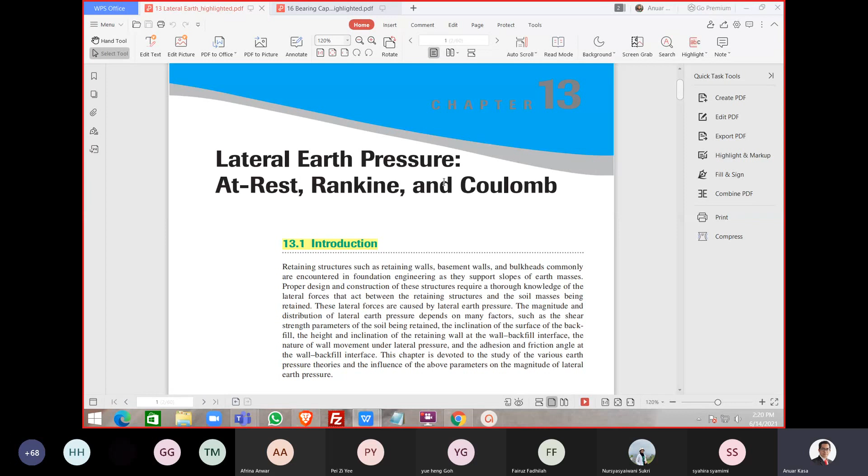Okay, so now imagine that you want to create a retaining wall. So you're going to have the wall itself. For example, okay, like this one, this is a retaining wall. So, okay, let me see whether I can get the highlight or not.

Okay, so let's say this is a retaining wall.

And definitely you are going to design this. Let's say you have a slope. Normally we create a retaining wall at a slope. Let's say we have a slope, and then we want to create a retaining wall like this one. So we need either to fill this area, the slope, something like this, so we need to fill this side and create a retaining wall. Or sometimes we have the existing ground line like this one, so we have to cut the ground and create a retaining wall.

So there are basically two methods of construction.

So let's say we decided to create a retaining wall, and now we want to start, since we learn concrete design, let's say we want to have a concrete retaining wall, or even we can have a steel retaining wall. Doesn't matter, actually there are many types of retaining wall: modular retaining wall, cantilever retaining wall, gravity retaining wall, and so on. I think that is in the next chapter, or maybe the previous chapter.

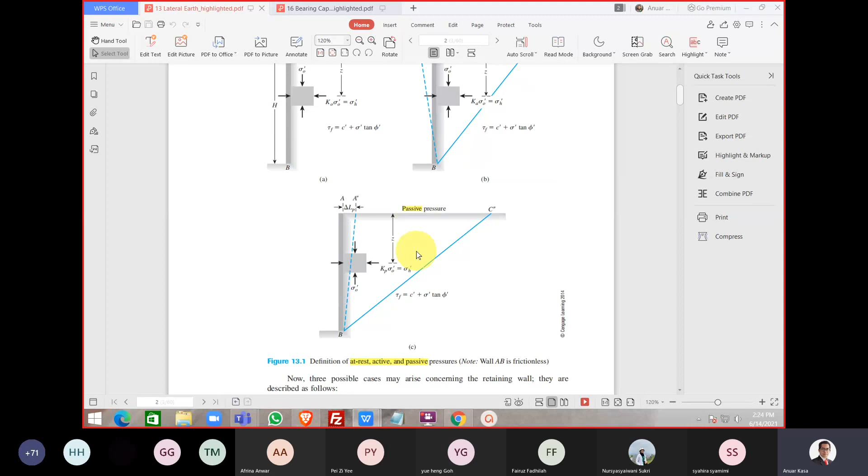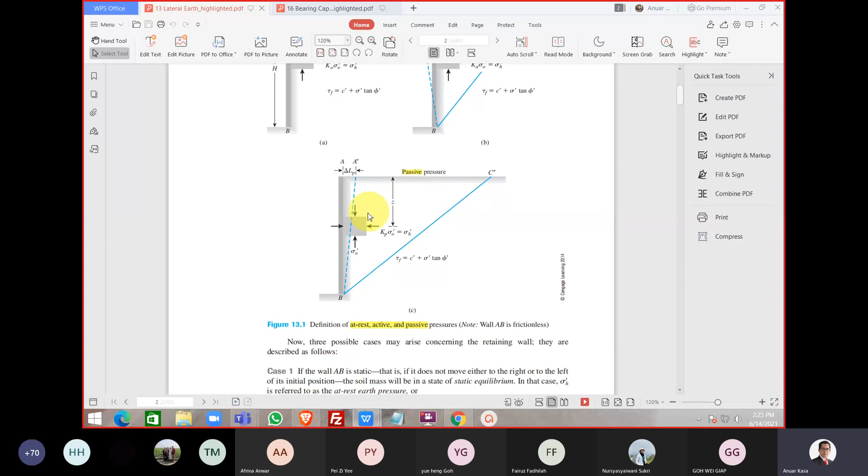And then the last one, the passive case, is when we design the wall, we want to make the wall push to the right of the soil. Then we need additional force from the soil. Since the wall itself is pushing to the right, the soil needs to have a greater force or pressure, so that the wall is in the shape like this one, in the passive shape. So there are three cases here.

If we look at the cases when we want to decide, for example, when we want to have the at rest, when we want to have the passive case, and when we want to have the active case, the decision before we decide is that we need to know.

Let's say we want to have a stronger wall. The strongest would be the wall in the passive pressure, because when we design it, we assume it is pushing to the right, and the forces or pressure from the soil on the wall is much higher. So this is the very conservative design.

And then maybe we want to ask, why on earth we want to have this kind of wall? It is like slanting to the right, not to the left or straight. So normally we design this kind of wall, for example, for a jetty, where this area is maybe the sea water, and there are boats or ships that sometimes hit the wall. So that's why they make the wall much stronger than the normal case. So that would be one of the applications.

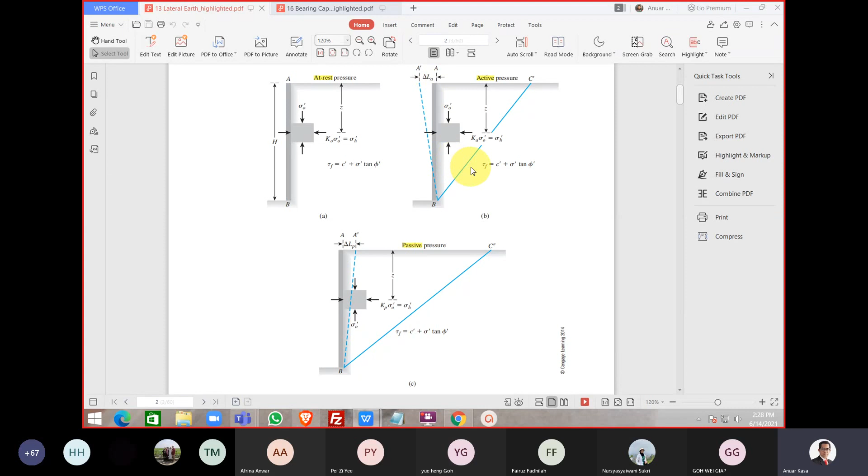Then to be economical, we design in the active pressure case. Something like this - the wall, we make it move to the left. And how far are we going to move the wall? Normally it depends on the height of the wall.

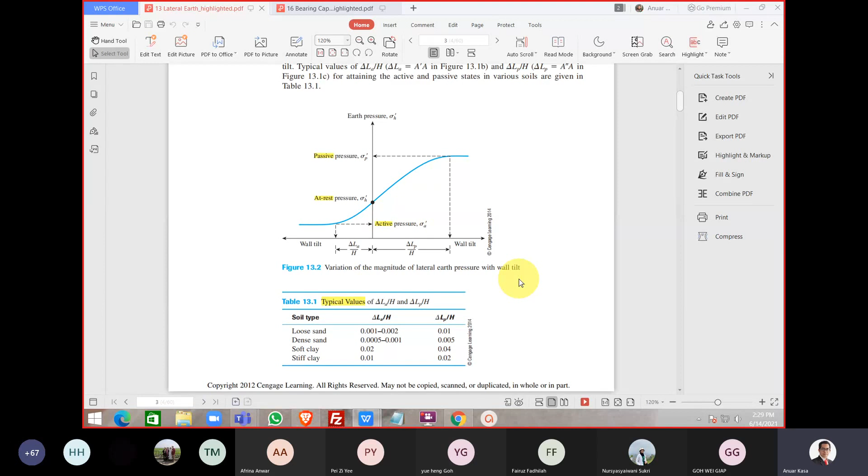Okay, so that is the three conditions. So if you were to imagine it simply - at rest is like when we are not hungry, we are just steady, so our tummy will be just flat like this one. But this one, active pressure, our tummy moves a little bit forward because we just ate.

That is active case. And this one, let's say we don't eat for 3 days, for example, our tummy is concave, very hungry. This is normal condition at rest, active pressure, we are full. Our tummy is big now.

So in that case, which one is economical if you were to invite these people to eat? Definitely, people who is full is cheap, eat little. For at rest, you can eat maybe 1 or 2 plates. But for the passive pressure, you're gonna have to spend a lot of money, because he's hungry.

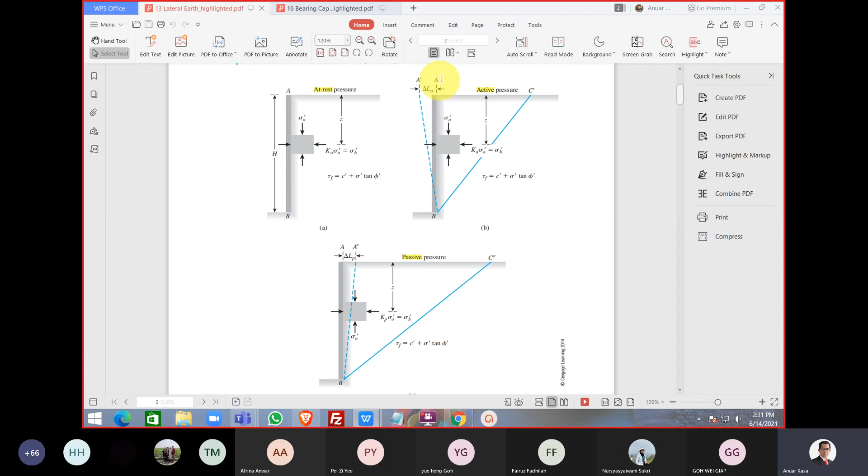So that is the condition to see which one is economical or which one is not economical. So most of the time, the engineer designs the active pressure case, because we want to achieve economy, use less money. So based on that 3 conditions, then we can start do the design or the calculation.

The idea is actually we just want to know what is the lateral pressure from the soil to the wall so that we can design the wall. If you are taking concrete design courses, you need to know that we need to provide the pressure or forces applied on the concrete. So to design the concrete, we need to know what is the lateral pressure applied to it due to the soil behind it. So the whole topic is about how to calculate the lateral pressure that the soil gives to the wall so that we can design the wall.

Okay, after the pressure, definitely we want to know the force applied on the wall. The concept that we need to know is K value. K is actually a ratio between horizontal pressure or stress over vertical stress. So actually we want to calculate the horizontal stress here.

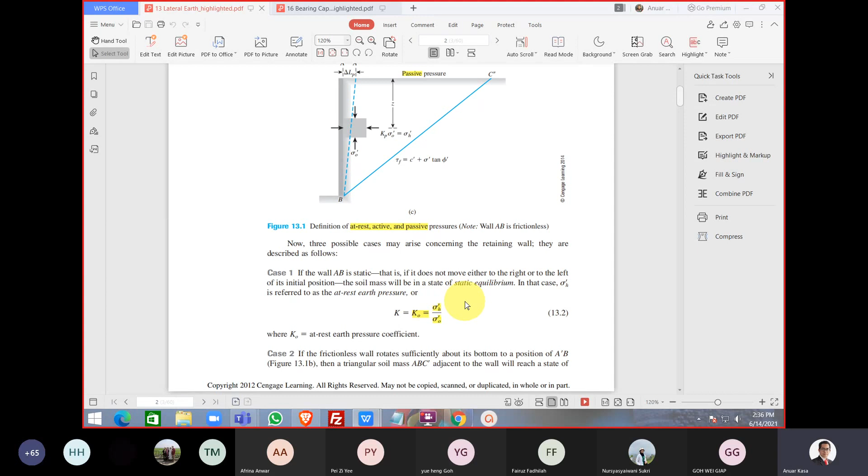So this equation, 13.2, is a general equation that can be applied to all three cases, except the equation for K naught, Kp and Ka is a little bit different. So you need to know first whether you want to design active case, passive case, or at rest. Then you need to know the equation for active, for passive, and so on. So it's just a matter of finding or using the right equation to calculate the lateral earth pressure or horizontal stress. The whole chapter is about using that equation.

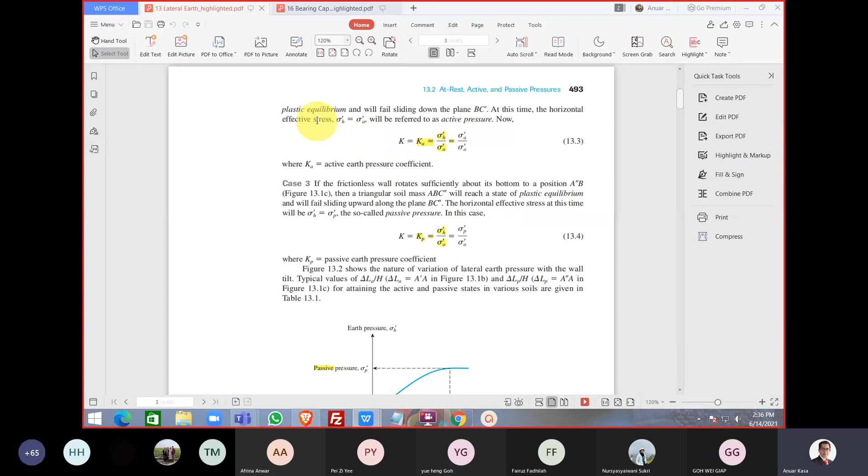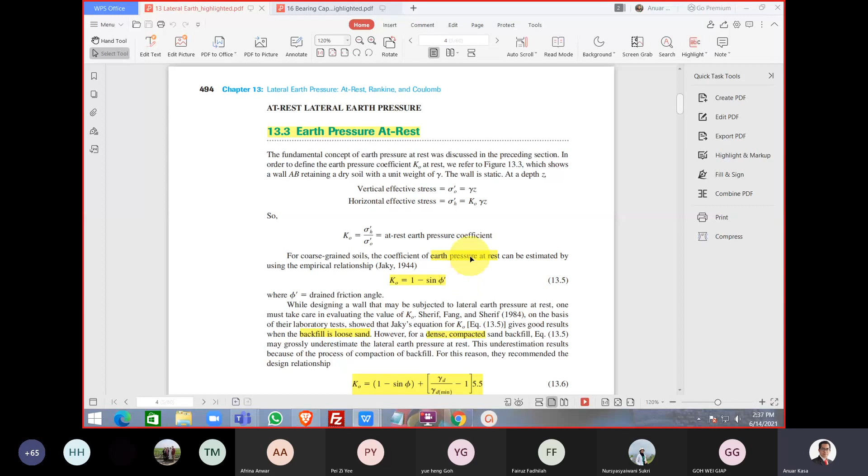So okay, now we look at, for example, the at rest case. At rest, the K value is 1 minus sine of effective phi. This is the equation that you're gonna use, and here it also mentions that for dense and loose sand, for example, you use this equation. So you just need to know which equation of K to use.

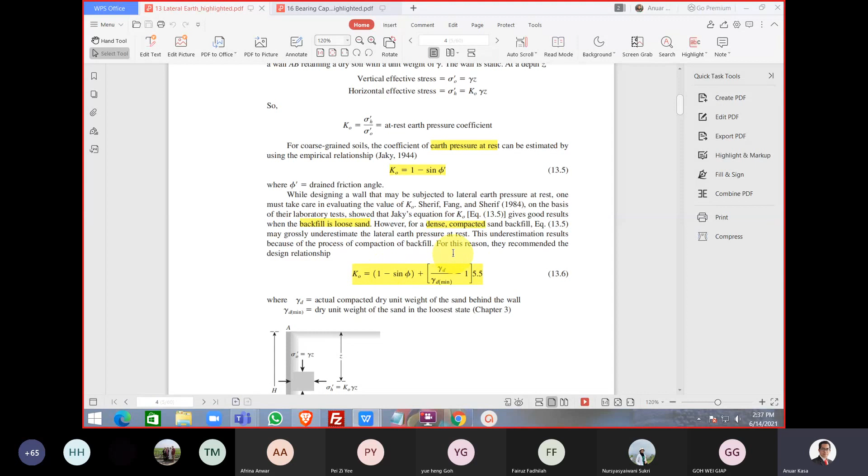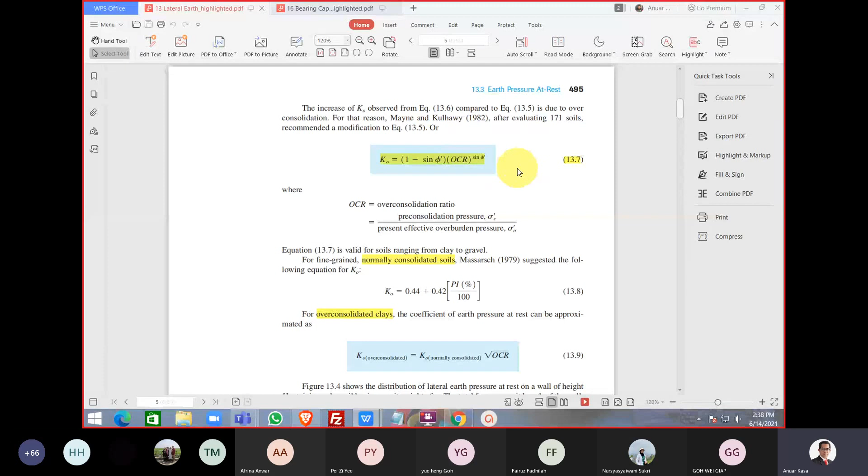And then this one, if it is about over consolidated soil or backfill, then normally we need to know what is the OCR, over consolidation ratio. Normally, if the question requires you to use this one, it will tell you that it is an over consolidated clay, and the OCR value is this and that. So then you know you need to use equation 13.7 and so on. This K, what is K naught for over consolidated, normally using this equation.

Actually, we can prove it by calculating the vertical stress. In this case, K is constant and vertical stress is increasing because the more load on top, the more vertical stress. So to calculate the horizontal pressure here, it is just K value times the vertical stress, which can be calculated easily.

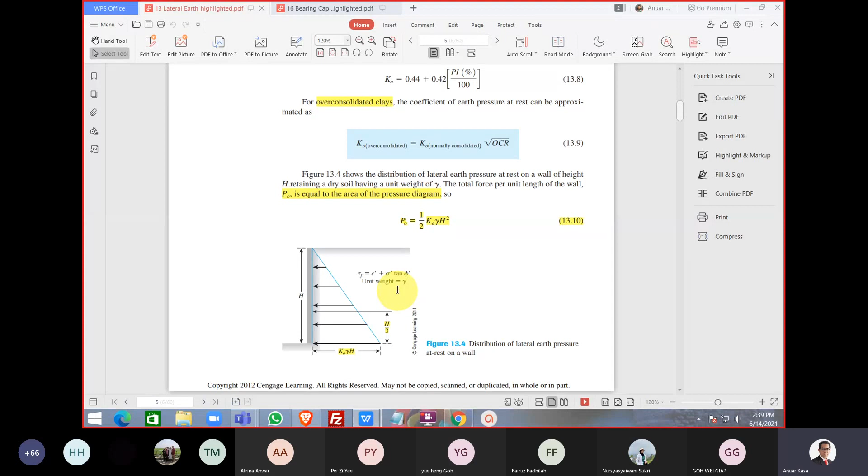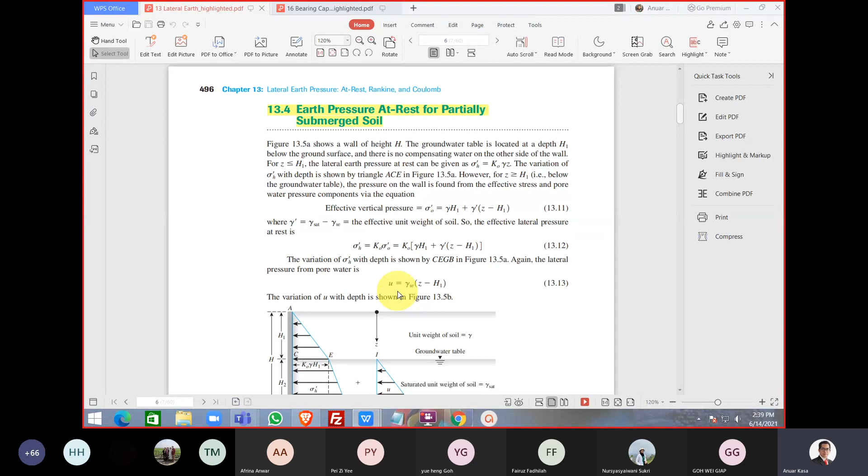Okay, here is about earth pressure at rest for partially submerged soil. When there is water, let's say the wall is submerged in water, for example like this one. The groundwater table is up here, so we need to consider the effects of water pressure.

Normally if there is no water pressure or groundwater level, the distribution of lateral earth pressure is just a straight line, A to C. But due to the water here, we have something like this, not a straight line, which is due to U, the pore water pressure. Pore water pressure is actually the unit weight of water times the height of the water.

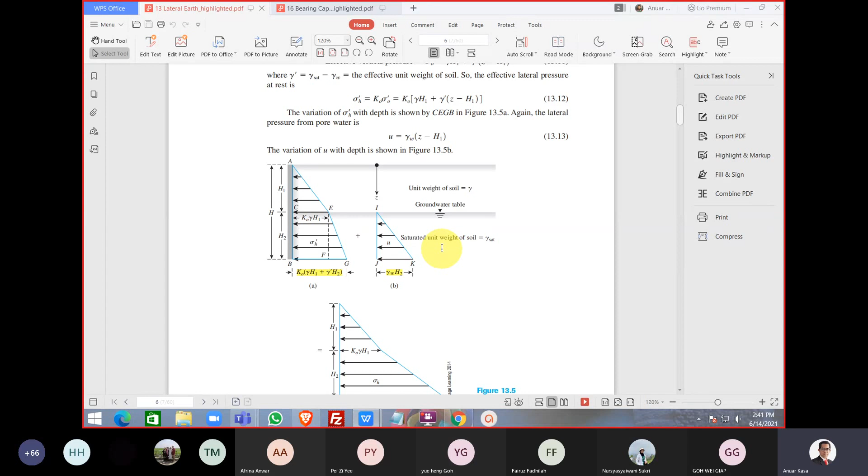So you can easily calculate it. I think in the previous chapter we also dealt with how to calculate the effective stress when there is water. It's the same thing, because that is the vertical stress. When we know vertical stress and the K value, we can easily calculate the lateral pressure, which is horizontal stress. So this is just a combination of these two.

This part is about the dry unit weight of the soil, and this part is due to the saturated unit weight of soil, and this is due to the existence of water, which is pore water pressure. We need to combine these two, so we get a pressure distribution something like this.

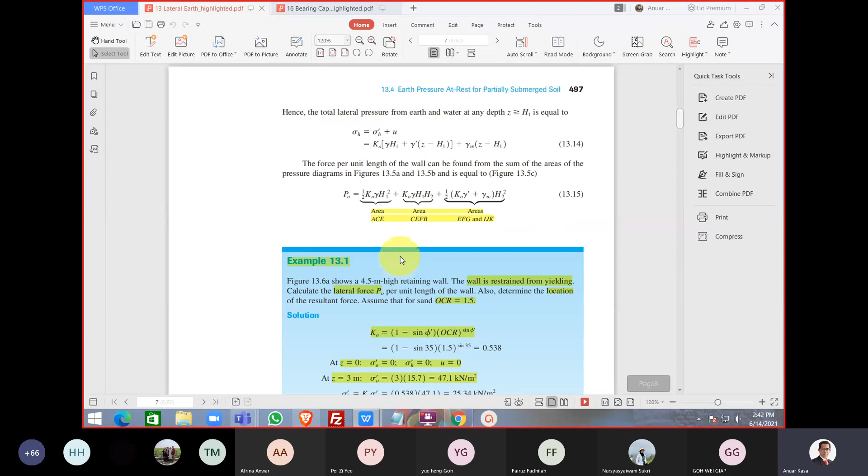Since we know that water pressure diagram, we can easily calculate the force due to the pressure. For example, in this case, for this upper part, the force location is 1/3 from the bottom here, and the value is just the area of the pressure diagram. The same thing also for this part, we can make it two parts, a rectangle.

For the rectangle, the location of the force is half of the height, so we know it is at the middle. The value for the force is actually the area of this pressure diagram. And we can do the same for this triangle, the location is 1/3 of the height below here, then we calculate the area of the pressure diagram to know the value.

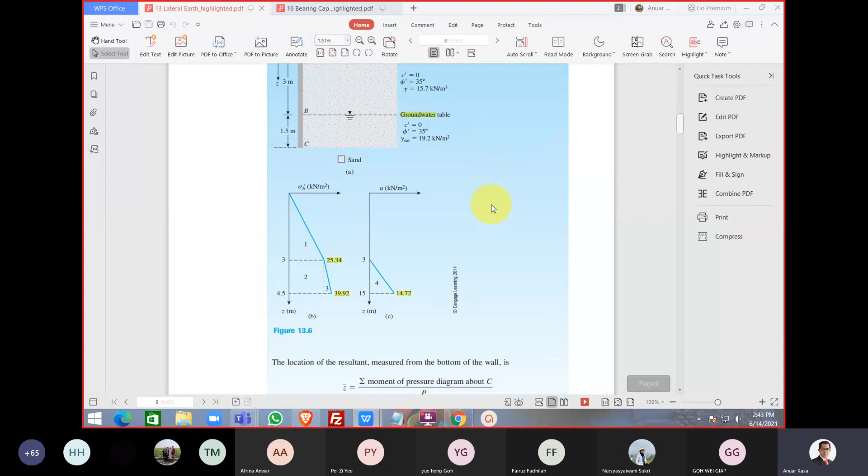The same thing for this one. So at the end we can get forces, not just a force but many forces. And at the end we're going to make it into one single force that represents the forces. So it is like this one.

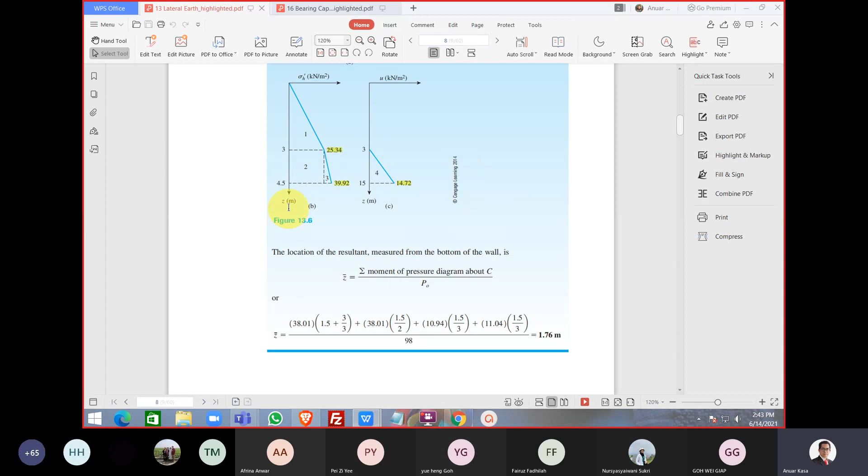So we can calculate, you can look at example 13.1. I think I tried to speed through because these should be in the lecture teaching video. For today, I just would like to go over it quickly so that you can ask questions if you're not sure.

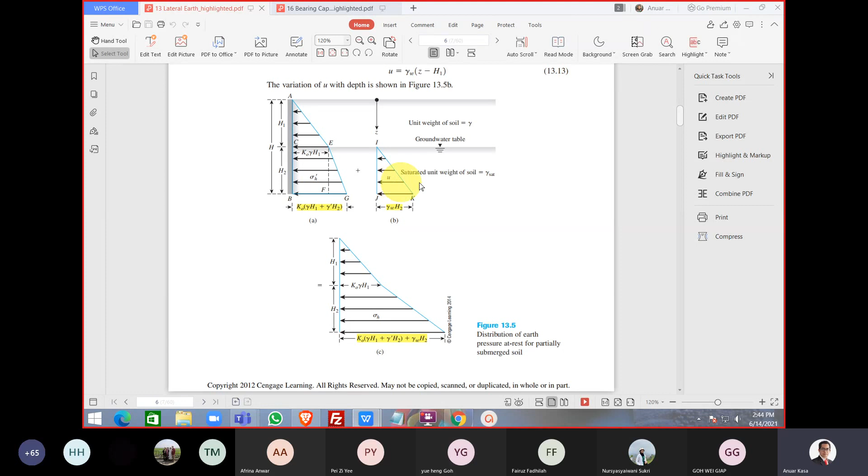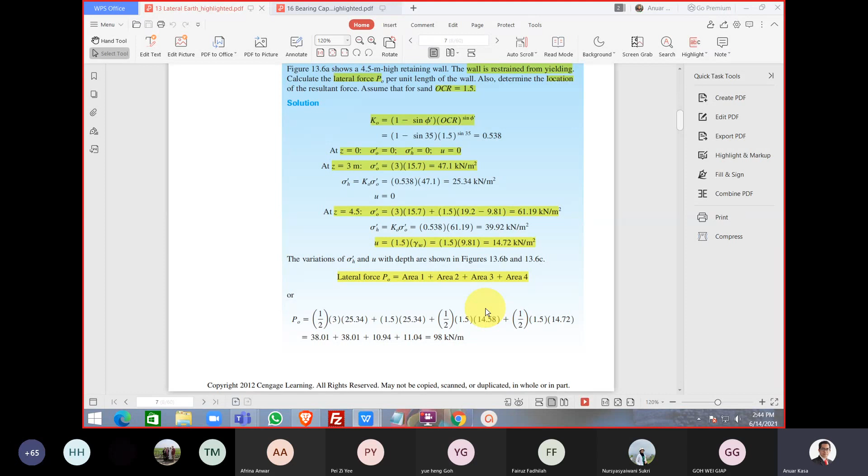Okay, so this is how to calculate the force, it's about the area of the pressure diagram 1, 2, 3, and 4. In this case, I think they are referring to this area, the triangle, and also the triangle. At the end, you can calculate the total P, what is the total force that the soil applies to the wall.

And the same for this one with the groundwater table. I think if you read carefully through the example, it won't be a problem for you to understand. Okay, next we go for active pressure.

Remember just now we were talking about at-rest pressure. Now it is the active pressure Rankine theory. So here we have another two theories, which are Rankine and Coulomb theory.

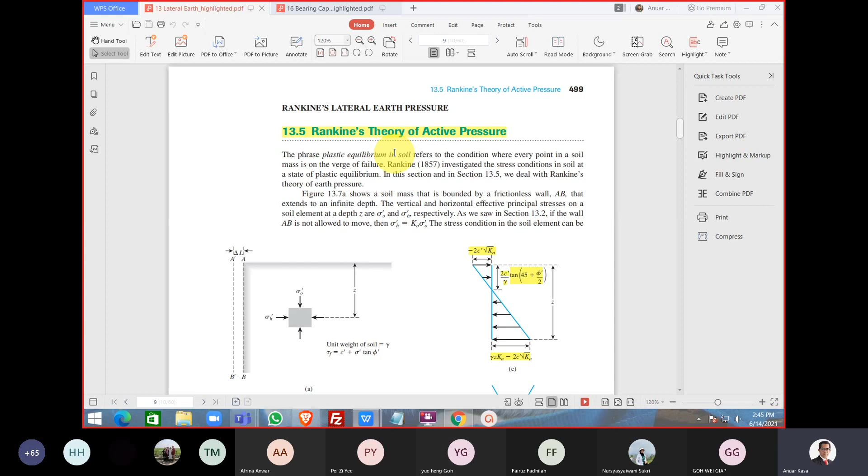The difference between the two is that Rankine considers the wall and the soil behind it to have no friction, meaning there is no contact or friction between soil and the wall, so the calculation becomes simple. That is Rankine. For Coulomb, it considers the friction between the soil and the wall, so the calculation of that theory is more complicated. When the calculation is complicated, the equation we get is a little bit longer than Rankine.

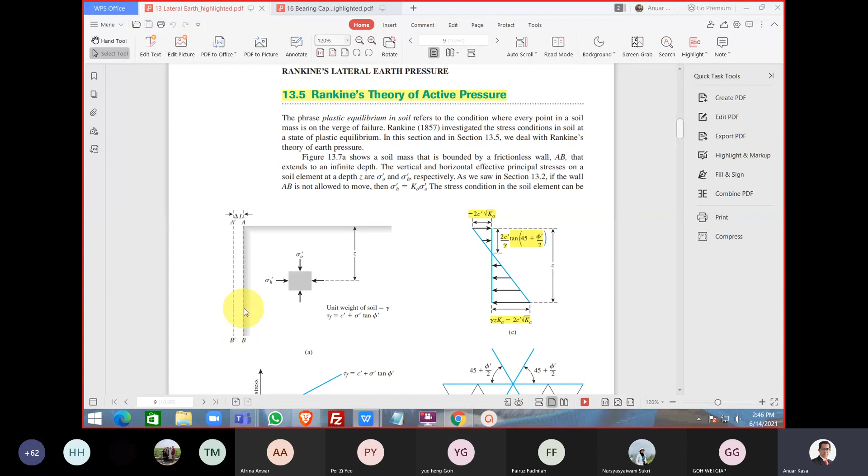Okay, for active pressure, since we say active, the wall will move to the left, so it is like bending. The wall profile will move to the left with a certain amount. So if we look at the pressure diagram, it becomes like this one, because the wall moves to the left, so the pressure also becomes like this. These are the diagrams.

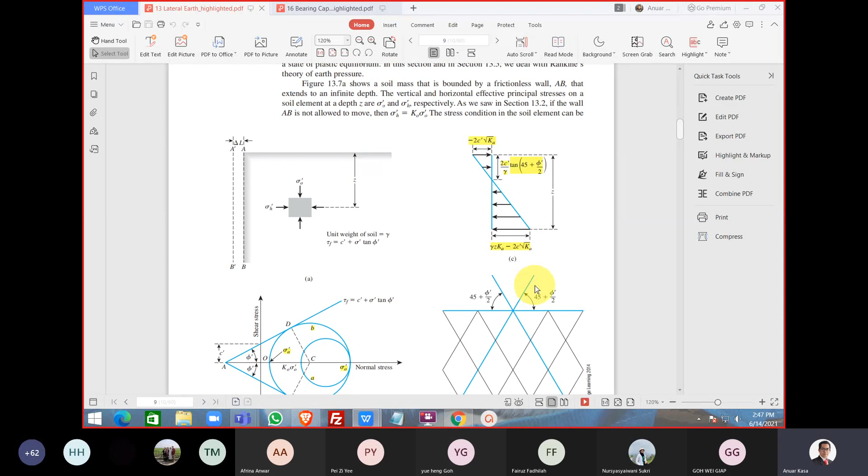We also need to know whether the soil is granular, which is sand, or whether it is cohesive, which is clay. So for clay and granular material, the equation for K may be different.

So you need to consider, when you want to design, the soil condition: whether at rest, active, or passive, and also the type of soil, whether sand or clay, whether over consolidated or not over consolidated, whether there is a groundwater table or not. You also need to consider whether you're using the Rankine theory or the Coulomb theory. From all those different combinations, you need to know which one applies, and at the end pick up which K equation is the right one.

So your task is actually not very difficult. You just need to know: if it is Rankine, use the Rankine equation factor. If it is clay, find the clay case in the Rankine method. If there is a groundwater table inside, then you need to consider pore water pressure. So those are the things you need to consider before you choose the right K value equations.

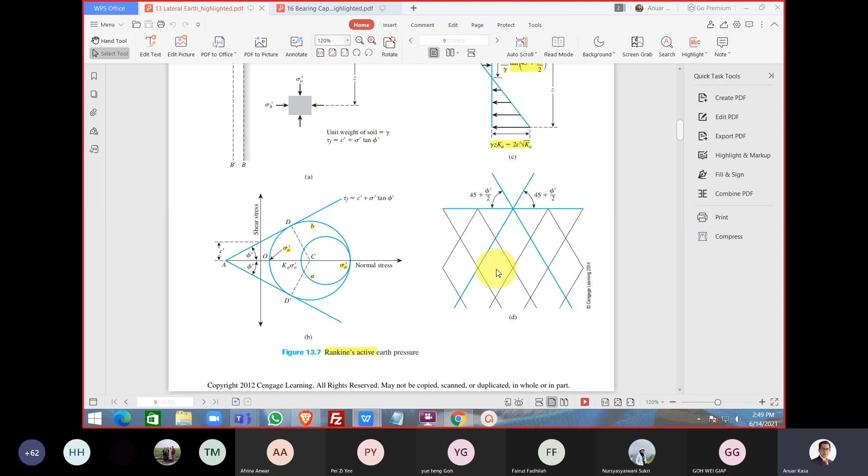This is, for example, Ka, for the active K Rankine method. The equation is tangent squared of 45 minus effective phi over 2. If you want to design for the active case, this is the equation you need to use for K. And then you can use the other equation.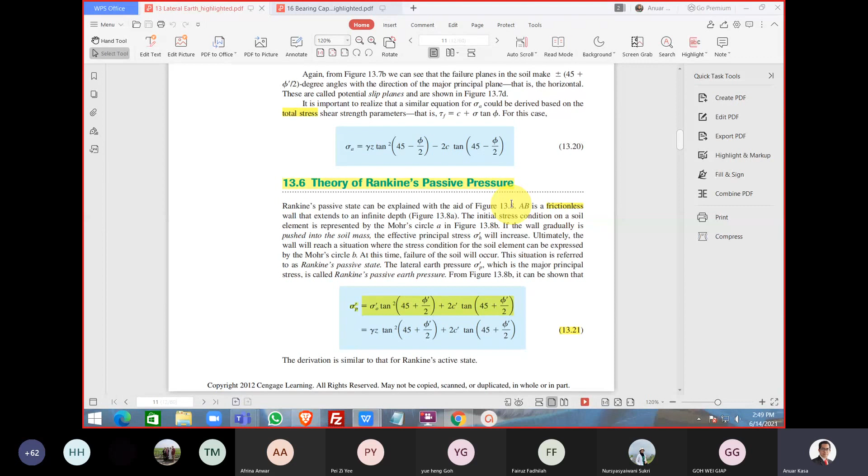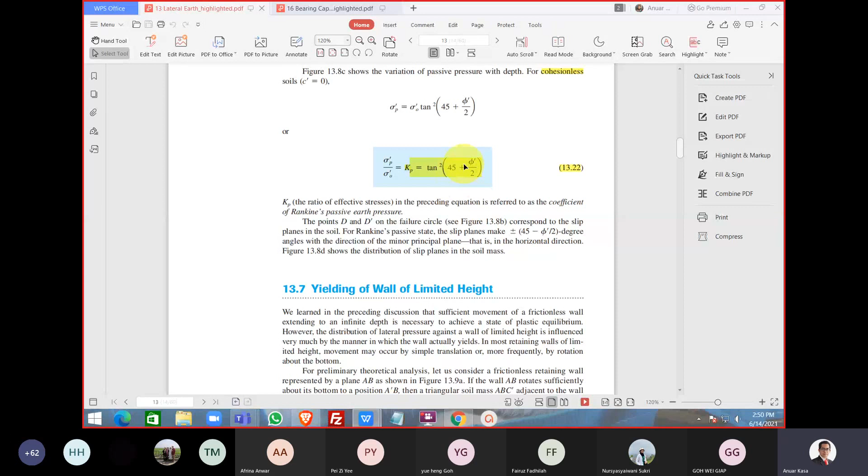This one is for the theory of Rankine passive pressure, for the passive case, where the wall moves to the right, so use this equation. This is Kp, the coefficient of Rankine passive earth pressure: tangent squared of 45 plus, instead of minus. So this is for Kp, while for Ka it's 45 minus.

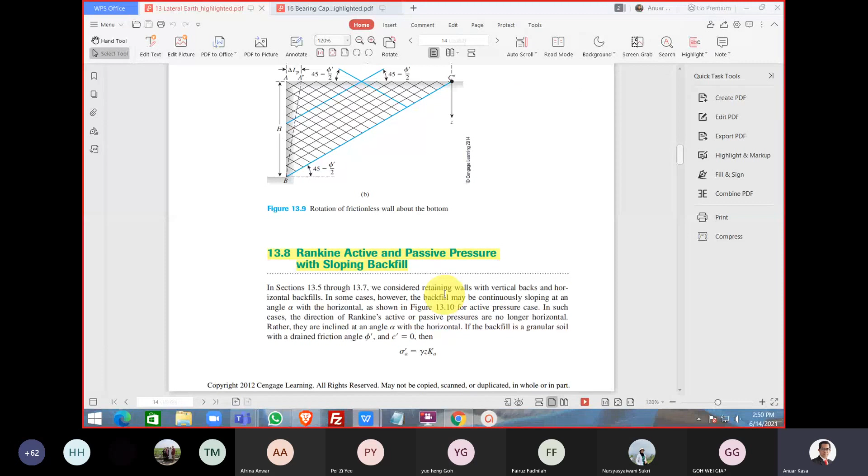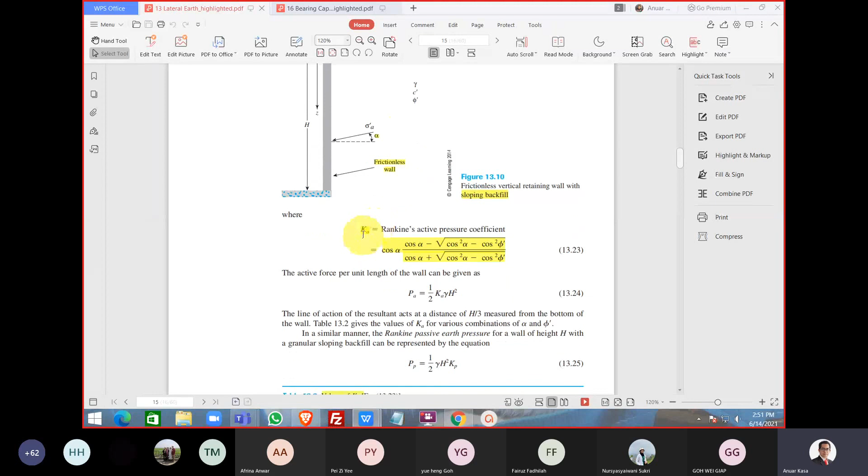On top of that, you also need to know whether the wall has a sloping top or not. For example, this is the slope. Normally there is a flat top, but when your wall has a sloping angle, you need to find the equation for it, because it's a different equation for Ka. So now it's a bit more complicated because there is a slope on top of the wall.

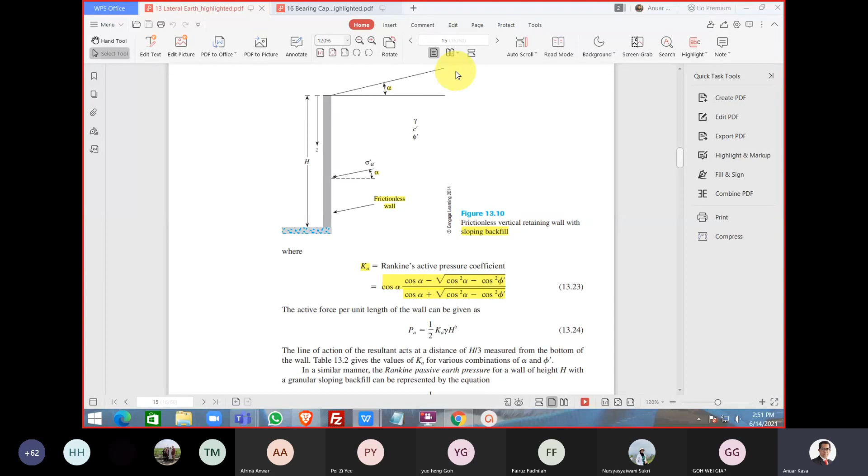You can use this handy table to find the value of Kp, or you can use the equation. But the equation can sometimes be difficult to calculate using a normal calculator, so the easiest way is to use the table, for example Table 13.3. You know the sloping angle and the phi value, and then you can get the Kp value from the table, so you don't need to use the equation to calculate it.

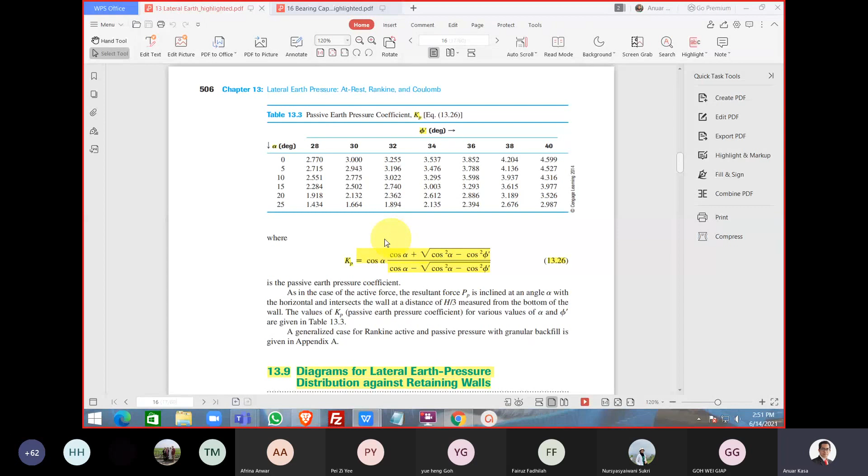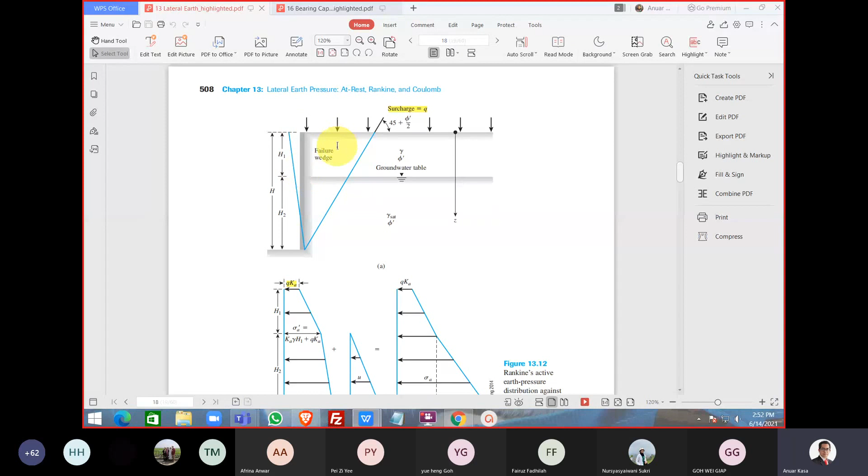This is the diagram, normally it looks like this. When there is a groundwater table, it becomes more complicated. And when there is surcharge, meaning maybe there is a building on top of the retaining wall, it also makes your calculation complicated, but it does affect the vertical stresses. So here we have this term.

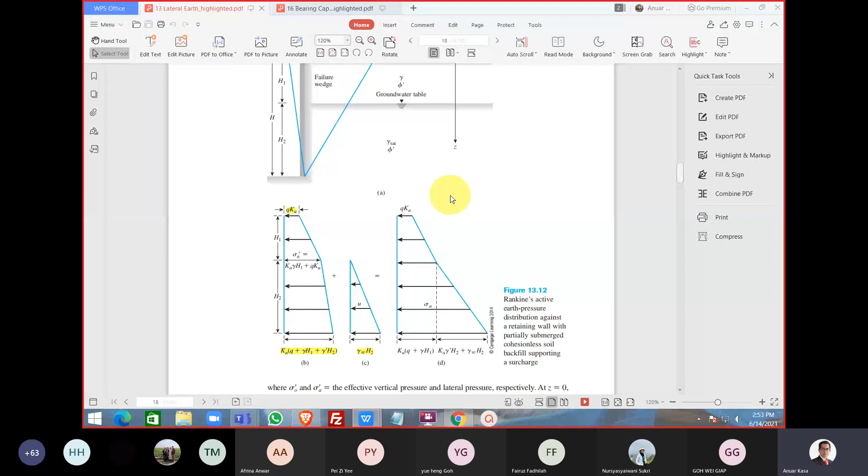Surcharge in kilonewtons per square meter times Ka, that is the value. And then we have the groundwater table here, that's why we have a different shape - it's not a straight line from top to bottom, due to the groundwater table. If you understand it, it's easy to see why this term and that term exist, because they need to consider the groundwater table and also the pore water pressure in the calculation.

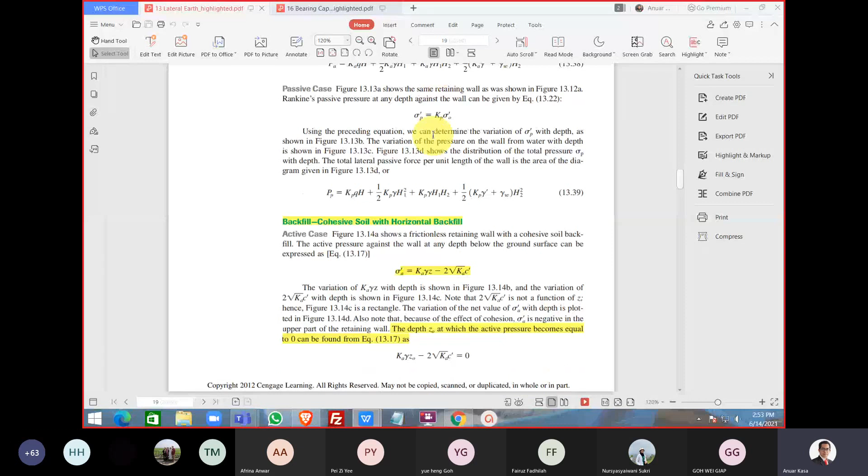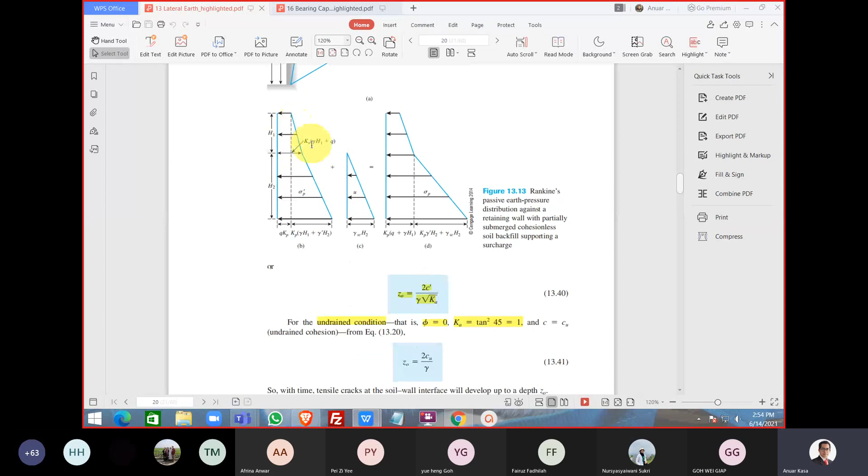Okay, for the active case, let's say this is the wall. This is the passive case. To the right is the passive case, and there is a surcharge. So the pressure diagram becomes more or less like this one. Actually, it's a similar concept.

Sometimes when we want to design the retaining wall, we need to consider that after construction the wall starts moving to the left. What happens to the soil is that behind the wall, maybe a few meters behind it, there will be a crack because the wall moved to the left and the soil cracks there. We can see the opening. If we look at the side, we can see there is an opening because the soil fails. Because the wall moved to the left, the soil will be cracked.

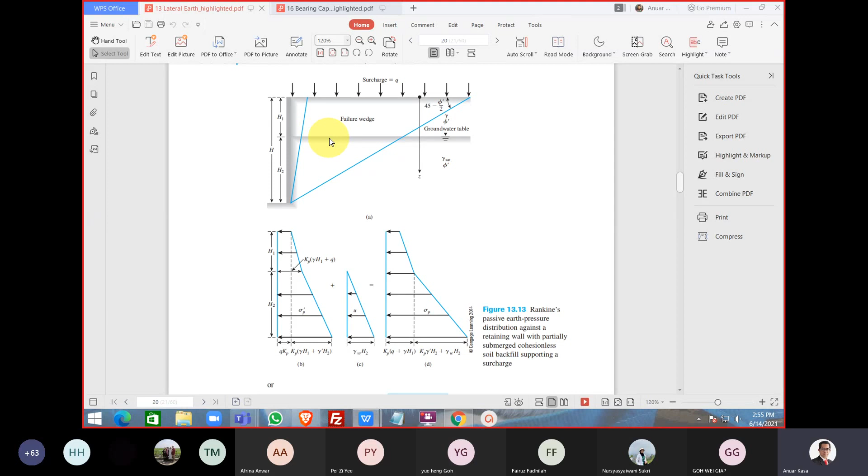So the length of the crack can be calculated using this equation.

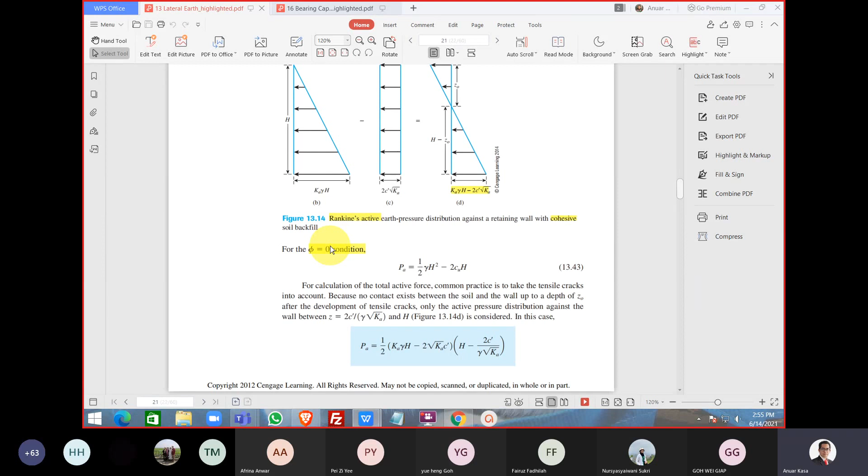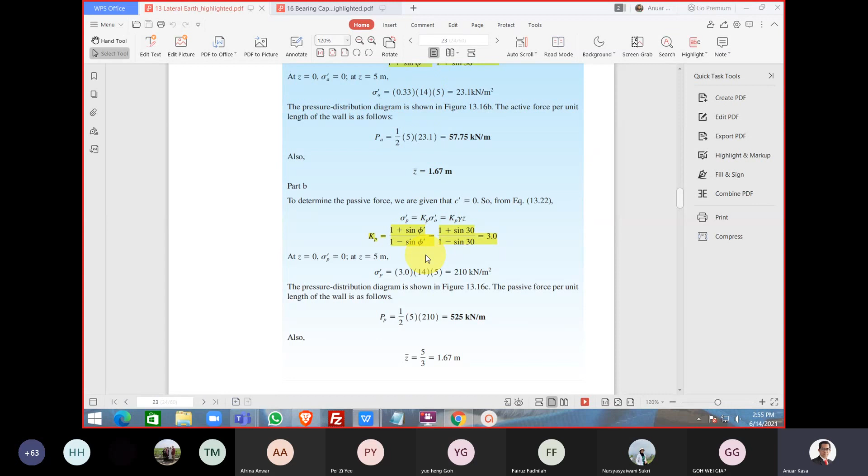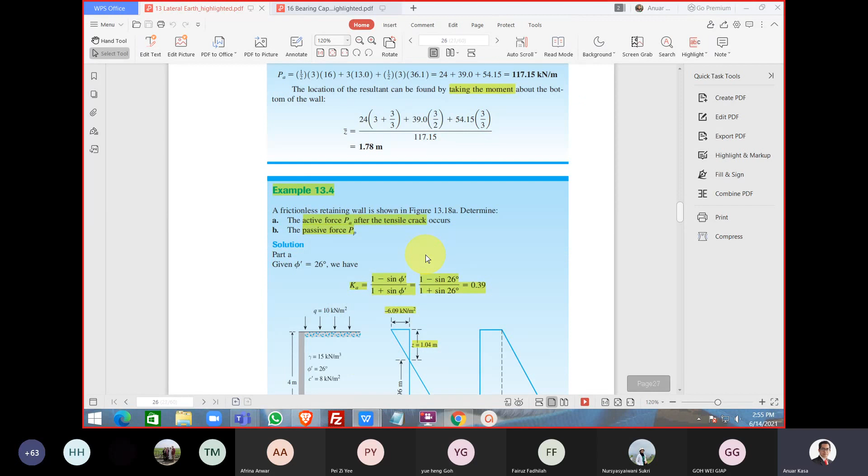And to understand better, you can look at example 13.2. It gives you a straightforward sample problem. And also 13.3. The rest, if you look, is actually straightforward, not difficult to understand.

And then after that, we look at the at-rest, passive case, active case, over-consolidated, groundwater table effects, and then the Rankine method, and now the wall with sloping slope.

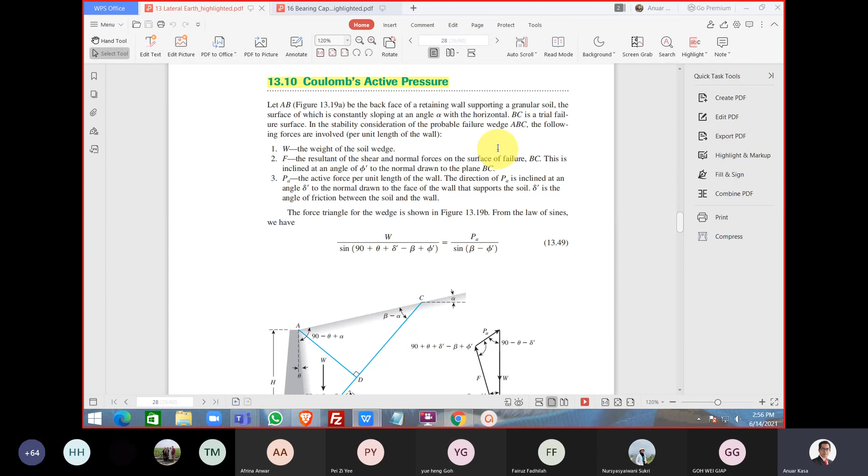So many different types. And then now we look at the Coulomb pressure. Coulomb considers the friction between soil and the wall, so the equation becomes more complicated.

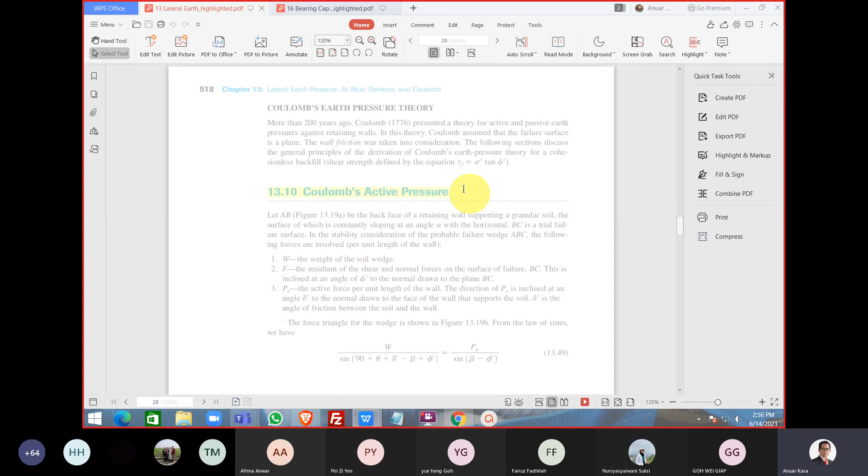So as we can see here, for active earth pressure, Ka for Coulomb, the equation is lengthy. So we have a question like this, and to calculate it, maybe after you calculate it, you get the wrong answer because your calculation is not right. So the easiest way is to look at the table given to calculate the Ka.

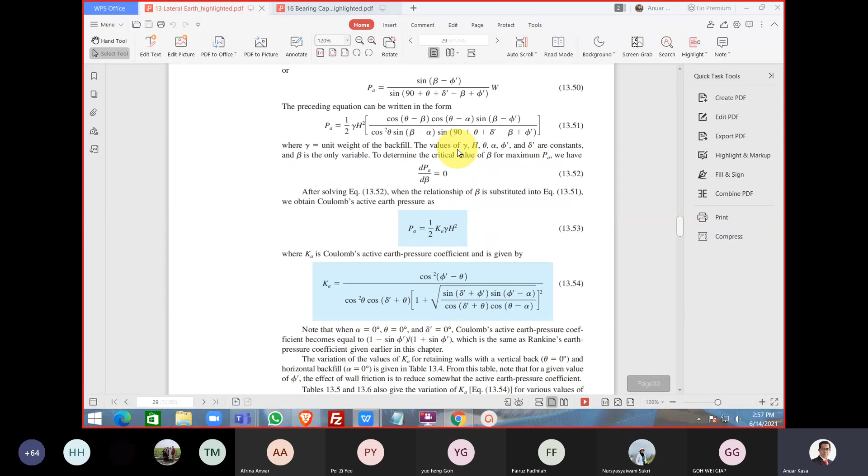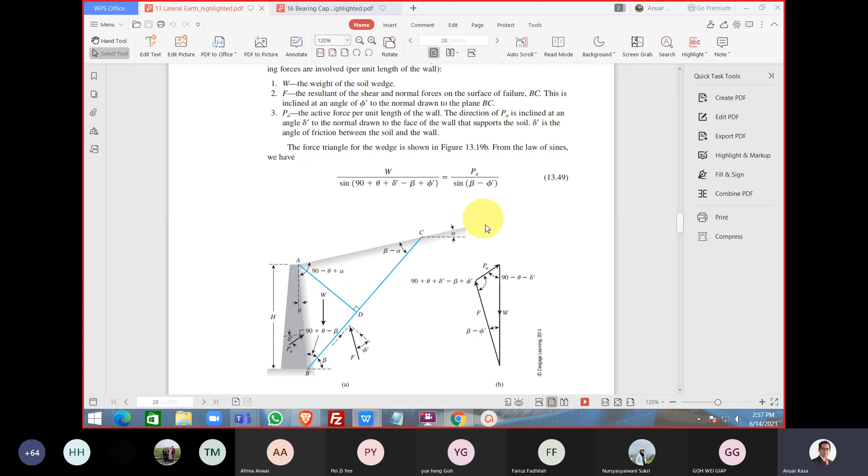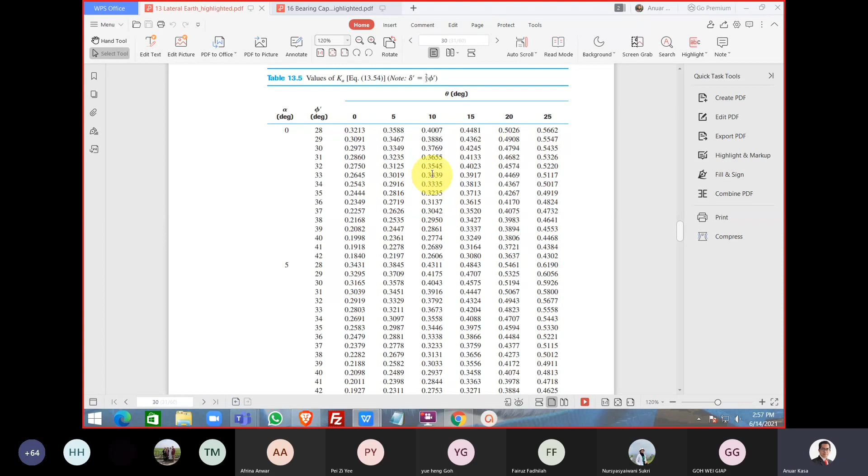Knowing the alpha, the slope angle, and also the phi value, and also the angle here - we need to look at the figure here. So here is the beta, this is the phi value, this is the alpha value, and this is the theta value. So we need to use those values and put them in the equation, or we can just look at the table to find the coefficient of active pressure.

So the idea is actually to find the K value. When you get the right equation, you calculate the overburden pressure or the vertical stresses. For lateral pressure, you just multiply the two parameters and you get it.

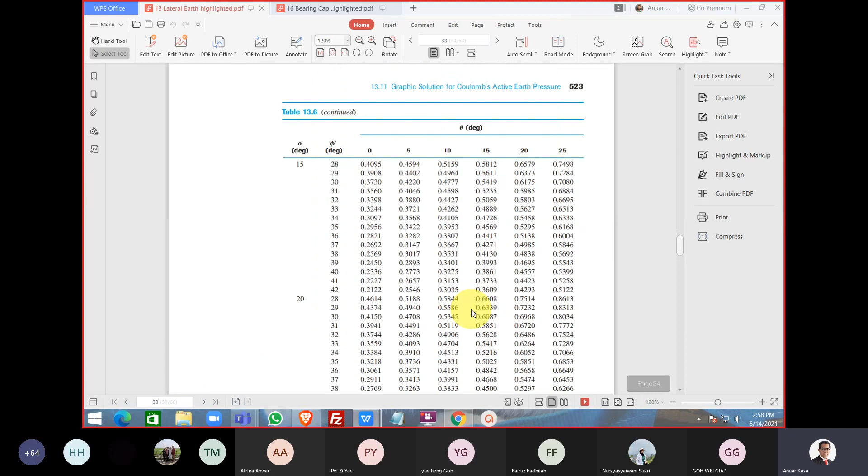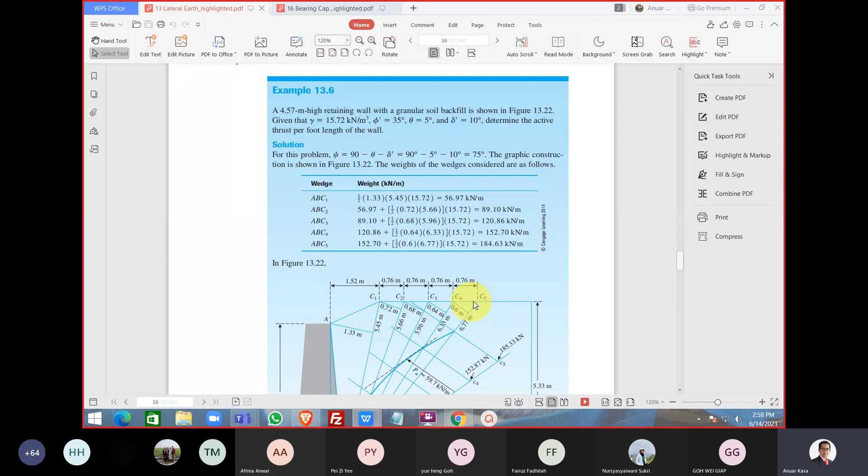Graphic solution, you don't need to look at this one - it's easier if you use the table. This is the way to do the Coulomb method. I think for Coulomb, you just need to use the table. You don't need to do the graphical method; that is beyond our scope.

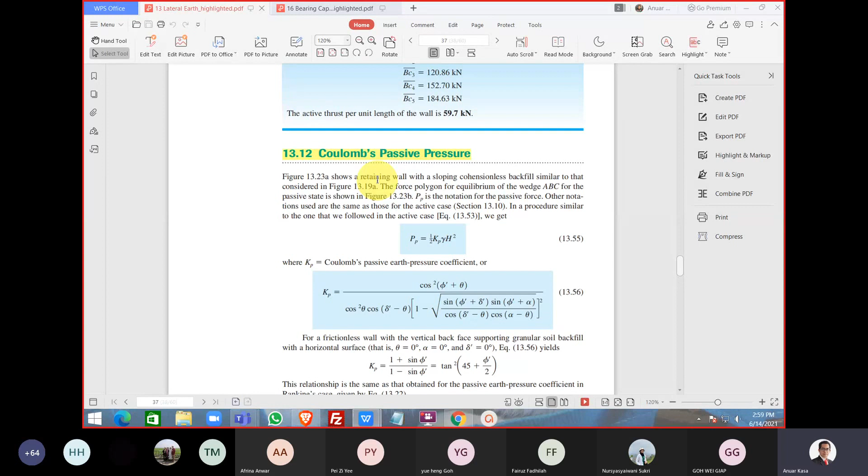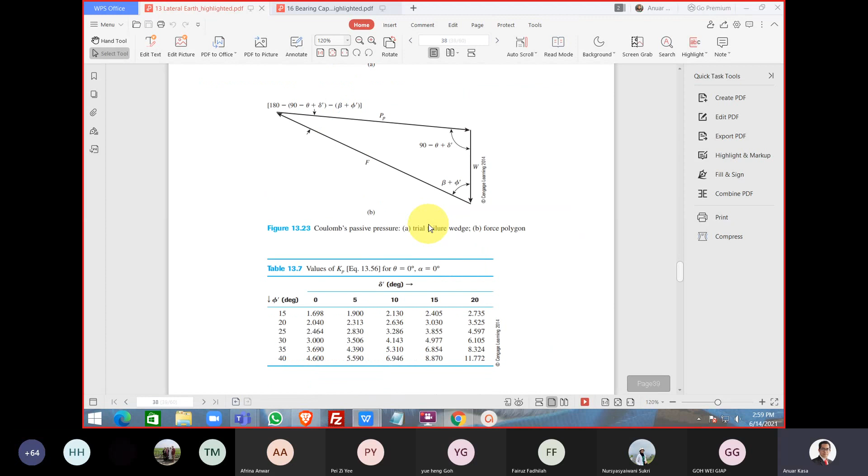And then we look at the Coulomb passive pressure. Just now was about active pressure, and now about passive pressure. So the equation Kp is given here, which is also long, so we need to use the table. So the rest, I would say there is not much.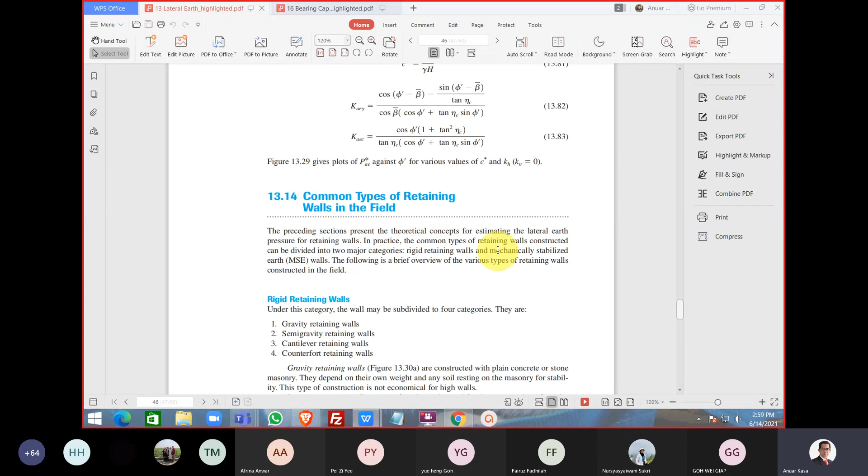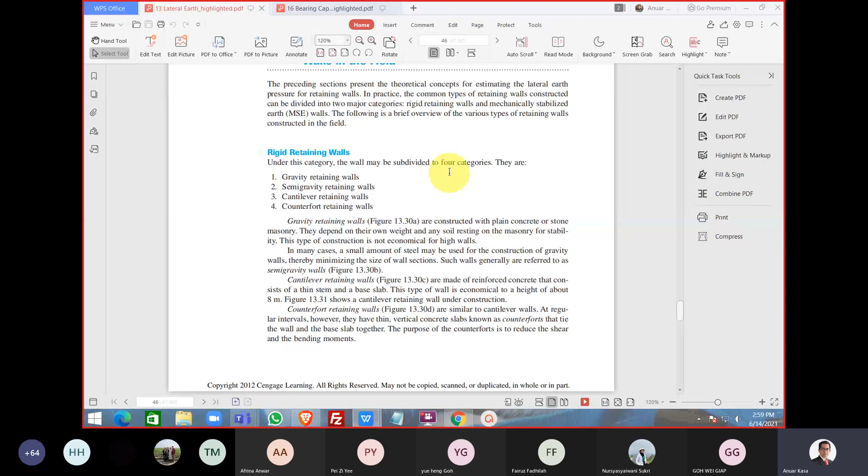And then a type of retaining wall - at the beginning I mentioned about the types of retaining wall. Here we do have the types: gravity wall, semi-gravity, cantilever, counterfort, and so on. We can look, I think there should be a picture here. Gravity wall is like this one, no reinforcement inside, so it depends on the weight of the concrete.

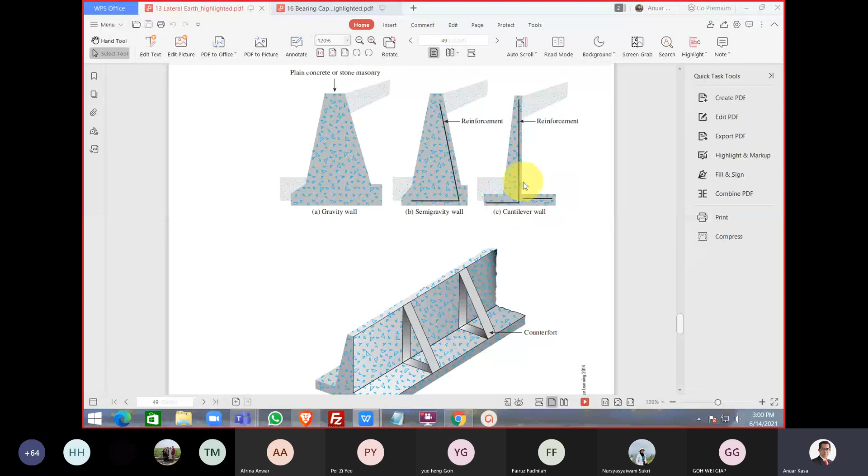Semi-gravity by putting the reinforcement. Cantilever here, because they call it cantilever here, so with reinforcement it becomes cantilever. And this is the counterfort wall.

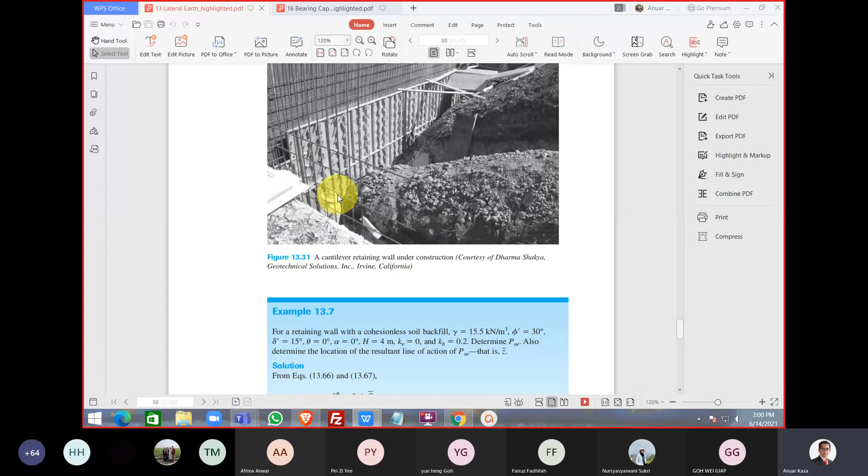Yeah, this is a sample of a cantilever wall. So the wall here, I think behind it there is a cantilever. Cantilever in Bahasa is 'terjulur'. So when there is something, the beam terjulur or cantilevered, we call it cantilevered.

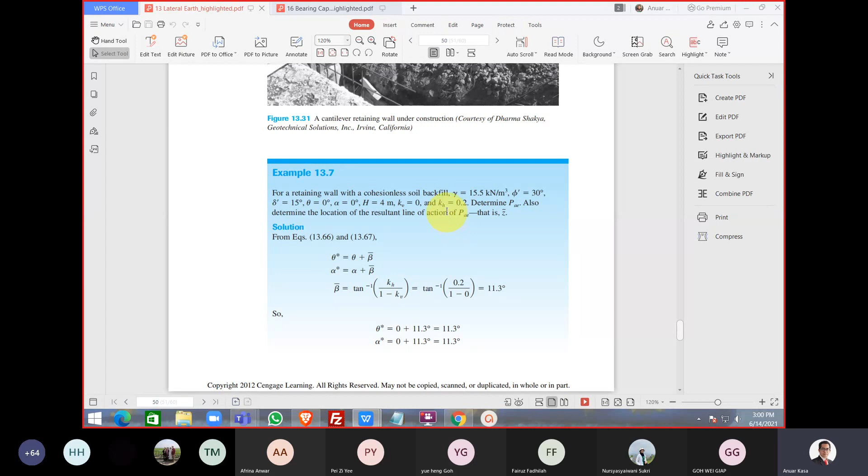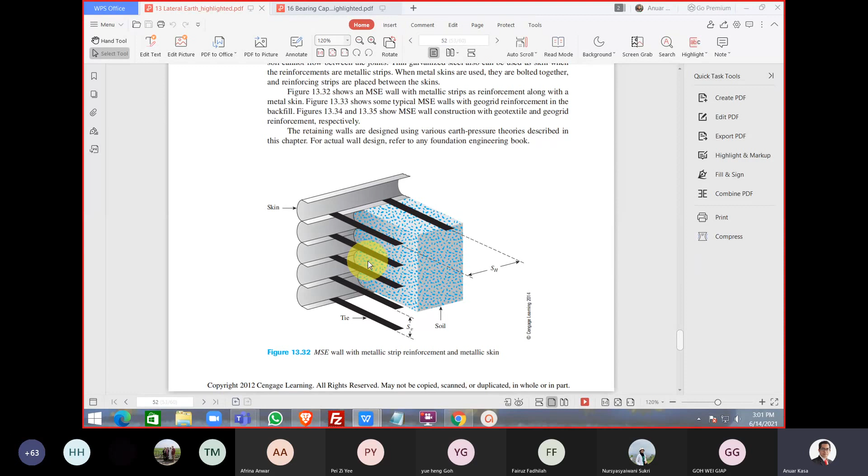And this one is a relatively new concept in retaining walls - they call it MSE, mechanically stabilized earth. Sometimes they call it reinforced earth, because we know that soil behaves like concrete, which is weak in tension, strong in compression. So when we want to use tension, we need to put reinforcement here. That is why the soil is reinforced, or we call it mechanically stabilized earth wall - the earth is reinforced.

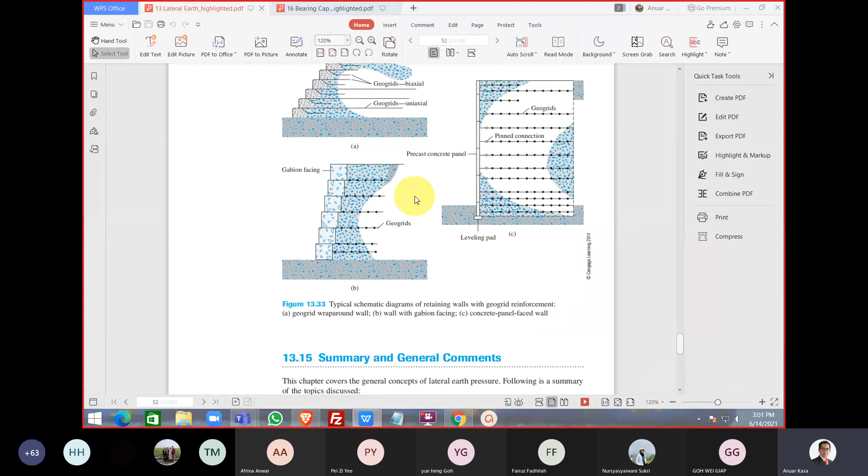So if we look outside, maybe the north-south highway, then you can see a lot of retaining walls using reinforcement, or the MSE wall. If you look, let's say when there is a flyover, you see blocks of concrete arranged in a nice way. The wall is concrete block, and normally behind it there is steel reinforcement, if they use granular material like sand as backfill. But sometimes they use geotextile or geogrid instead of the steel reinforcement.

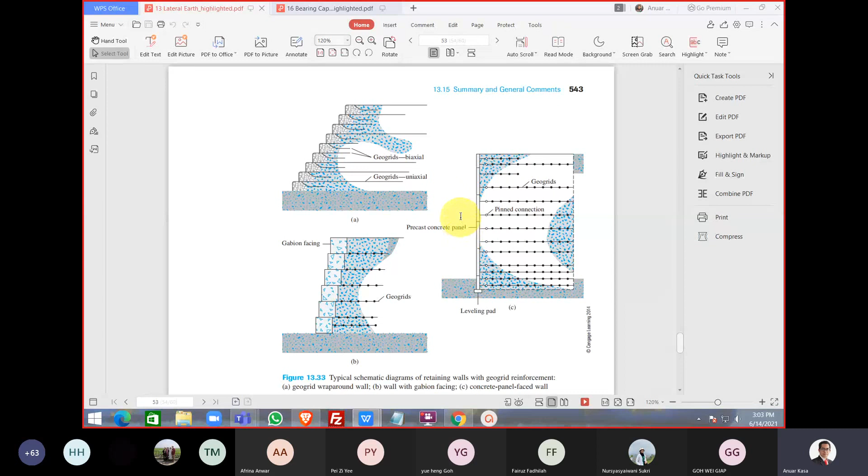Sometimes the gabion, if you want to know, you see a rock like in a steel mesh - that is a gabion wall. It is a gravity wall, but now to reduce the size of the wall, they use reinforcement behind it. So you may use geogrid, geotextile or even steel.

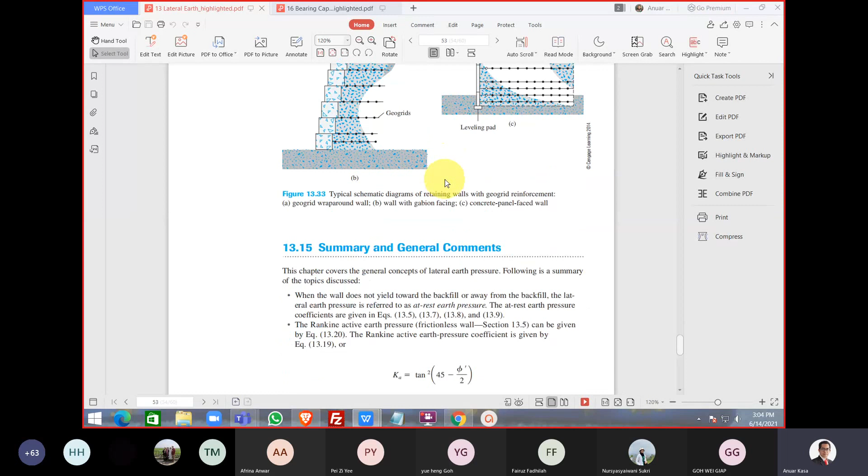So this is the concept of MSE wall, mechanically stabilized earth wall. Okay, so that will be the end of the chapter.

This picture shows the geotextile or geogrid laying behind the wall. Normally the construction is from bottom to top. So nothing here - now they want to create a retaining wall. They compact the soil and then at a certain level they apply the geogrid. Some part of the geogrid is under the wall, meaning this is a segment, many segments.

So the wall locks the geogrid or geotextile, and then they pour the sand, the soil, they compact again at a different, higher level, and then they lay another layer of geogrid, and then they compact again, put the soil, compact, put another layer, and it goes on until the required height of the wall.

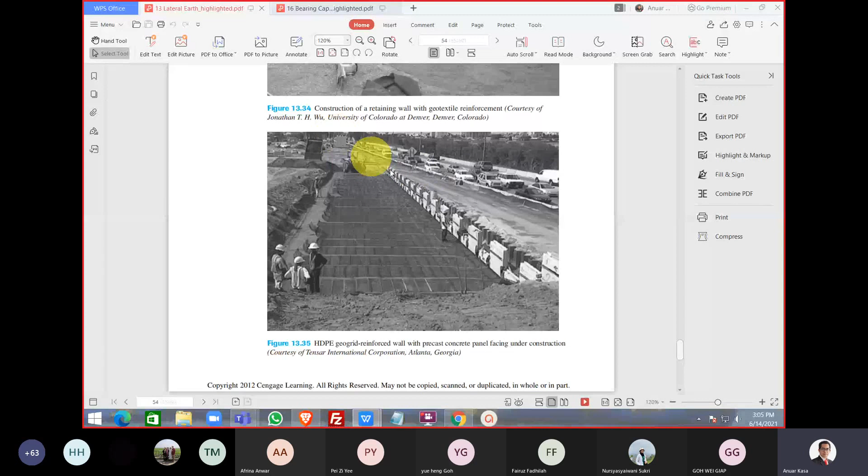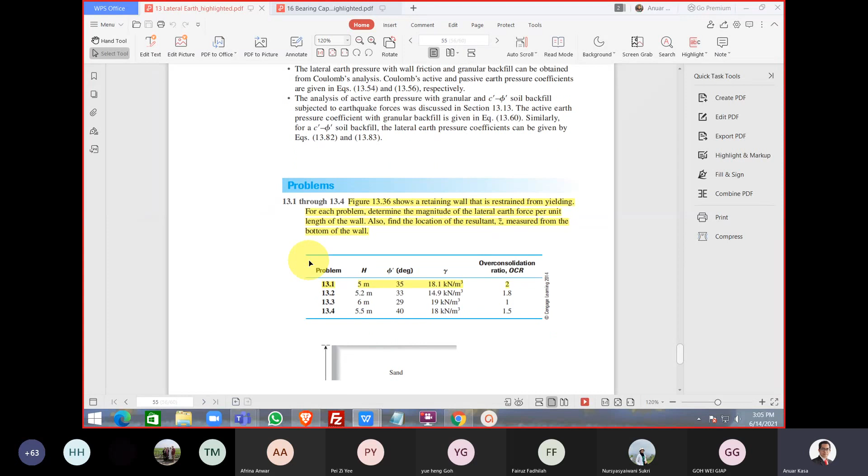Okay, so that would be the end for chapter 13, which is lateral earth pressure. So you need to do the assignment for that. I think for the next chapter, we discuss it next week.